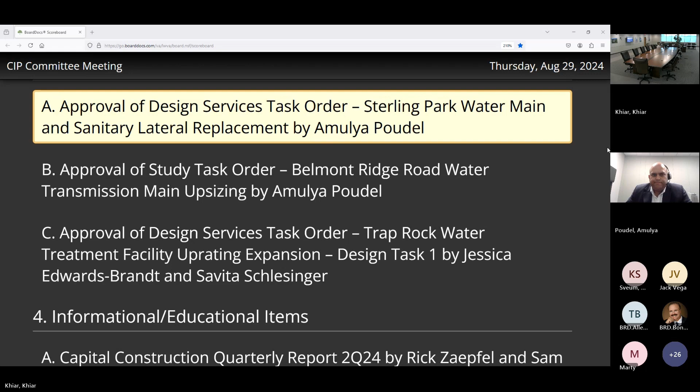Good morning, Mr. Chairman and the members of the committee. My name is Amulya Poudel, Program Manager with Capital Programs Group. I am here this morning to seek your approval of design task order for the Sterling Park water main and sanitary lateral replacement project.

Some background on this project: yesterday at the finance committee meeting, asset management team's Kathleen had a wonderful presentation that went into a lot more detail on why we need these R&R projects. This is a very summarized version of that. Overall, our system is a relatively young utility. However, certain pockets, mostly in Sterling, the pipes there are now old and have significantly deteriorated, and they're now in need of repair, rehab, and replacement. Currently in our water system, we have about 70 miles of cast iron pipe, and the goal is to replace them over the next 14, 15 years.

Over the last couple of years, the asset management team has been working on assessing the condition of all of these linear assets, taking into consideration things like pipe age, material, break history, local site condition, and the likelihood and consequences of failure. The asset management team has put together a priority list, and as we move forward, we will be addressing each of those prioritized projects. Today's project that I have here for your approval is one of those early projects.

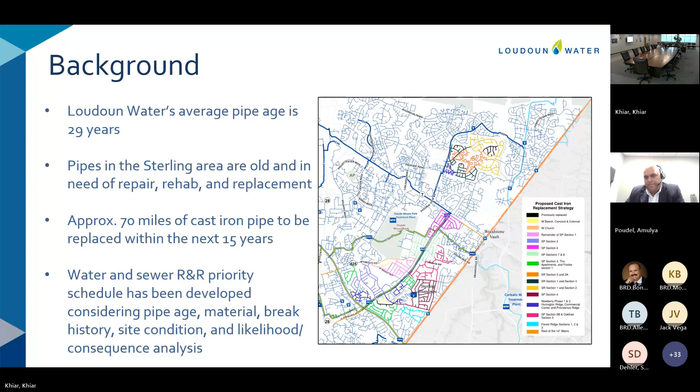So project location: in the central system, we operate our water distribution in 4 distinct pressure zones. This project is in zone 510, and it's in the Sterling area, generally bounded by West Church Road, West Holly Avenue, and North Sterling Boulevard. There is a little more than 5 miles of pipe in this area.

The yellow highlighted streets are water main and sanitary sewer that we will be addressing with this project. As you can see, there are two sections that are not included, and I'll come back to this after my next slide.

The driver for this project: the exhibit on this screen is a screenshot from our GIS. Each of those brown diamond-shapes represents a water main break that we have had in the system. As expected, most of these are in the Sterling area, and even within Sterling area, the circled area is where we have the most concentration of breaks. I think on the last count, since we started keeping track of the breaks, we were at about 1,084 or something, and almost a quarter of the breaks occurred in this general area.

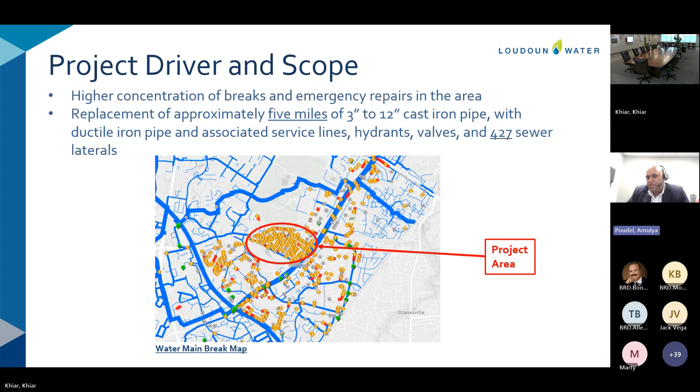On the sewer side, back in 2013, we rehabilitated the main sewer lines—we CIPP lined all the pipes in this area. However, at this point, the laterals that serve individual homes have significantly deteriorated and are primarily driving inflow and infiltration into our system. So with this project, we will be replacing all of those sanitary laterals that are within the project area.

Going back to the slide, the reason we do not have these two sections included in this project is that within this area, these two streets in particular had a higher concentration of breaks. So we carved them out as a separate project. The board approved it a couple months ago, so design is already underway, and we plan to put them into construction sometime next year. We carved these out as a separate, earlier project than this bigger package here I have in front of you today.

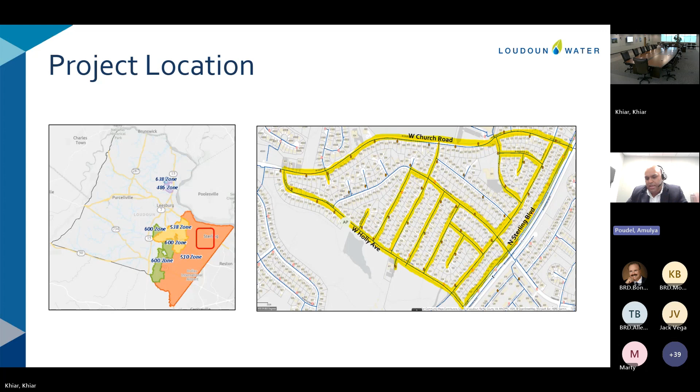I do not see raised hands, so I'll keep going with my presentation. This is the typical scope of work associated with a linear project like this. The consultant will be tasked with providing project management throughout the duration of the project. The design services on this task order will include aerial survey, topographic base mapping, some geotechnical investigation, and primarily preparation of bid drawings, specifications, and cost estimating.

On the permitting side, most of this water line is in VDOT right-of-way in a roadway, so there will be heavy coordination with VDOT when it comes to permitting for this project, and some Loudoun County permits. When we are ready to bid this project, we will need some assistance from the consultant with responding to bidders' questions, preparing addendums, and things like that, as bid phase services are also included in this task order.

I have two questions. I assume that the sewer laterals and the water laterals are just to the property line. Is that correct? Yes, we will address only up to the property line. The meter crocks would be...

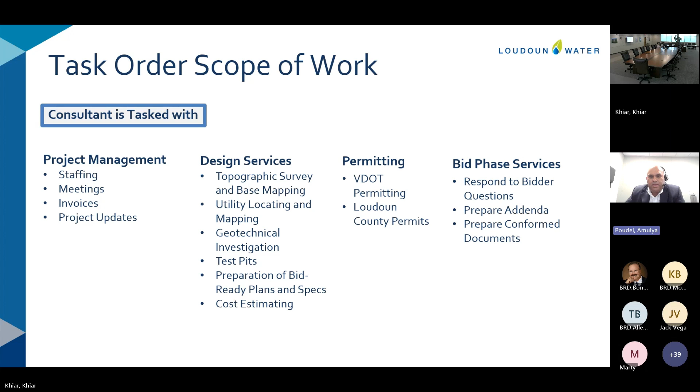So for this project, we selected J2 Engineers. J2 is one of our civil on-call consultants, and they've performed several linear sewer and water projects for us here just within the last couple of years. They're very familiar with our engineering design manual and Loudoun County and VDOT permitting process.

For this project, what I have for you here is the itemized breakdown. This is a very high level breakdown for the purpose of today's presentation, but the way we came to this is we built it from the bottom. The spreadsheet we use goes into much more granular detail, with multiple tasks, subtasks, and various labor categories. So that's how we came up with this fee that was acceptable to us.

In this particular project's case, we had some other directly relevant projects. Broad Run Farms would be an example, about the same size. So we had some other data points we could use to compare how this fee lines up with our past experience. Overall, we found the fee of $558,000 for this almost 5 miles of pipe replacement project acceptable.

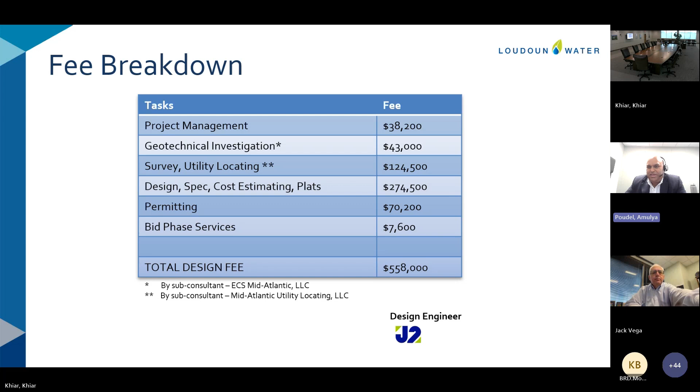Thank you. Again, I do not see any questions, so I'll move forward to the next slide here.

The next slide here is something we've been tracking. This is in our CIP plan, the 10-year CIP plan. We've been tracking this project under Water 189.

The only thing I want to note is last year when we were doing the CIP plan, we were tracking the sanitary lateral under a different project. But over the last year, we've talked a lot about these R&R projects, and we've come to an agreement that it makes a lot more sense to do this lateral replacement together with the waterline, since you'd already have all this maintenance of traffic in place and disturbance in the area. So this year's CIP will change this. I wanted to note that in the CIP, we were tracking it under 2 different CIP numbers.

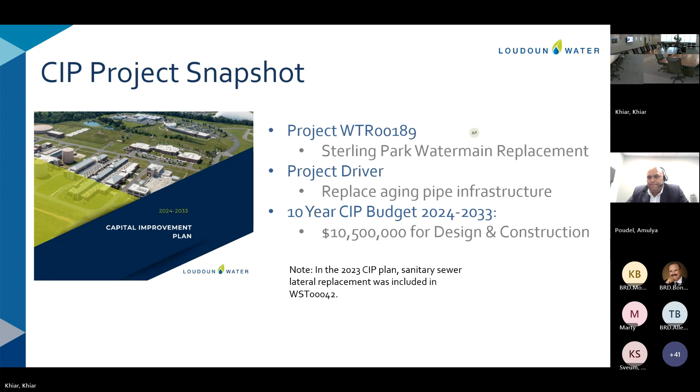And this is my last slide before the motion, so I'll take a pause for any questions. Do not see any questions. So with that, Mr. Chairman, I have the motion in front of you for your consideration.

Are there any other questions? No, sir. Jim, you want to read the motion? You seem to be ready. Sure, I'll be happy to.

I move the recommendation to the board to award a design task order for the Sterling Park Water Main and Sanitary Lateral Replacement Project to J2 Engineers, Inc. for $558,000, with an approximate 5% contingency to be controlled by the general manager, for a total authorized budget of $586,000. Additional costs will require board approval. I further move that this should be placed on the consent budget, consent motions.

This is Marty. Can we have a roll call vote? Yes. Mr. Bonfils? Yes. Thank you. Mr. Moody? Yes. Mr. Sveum? Yes. Mr. Vega? Yes. Thank you.

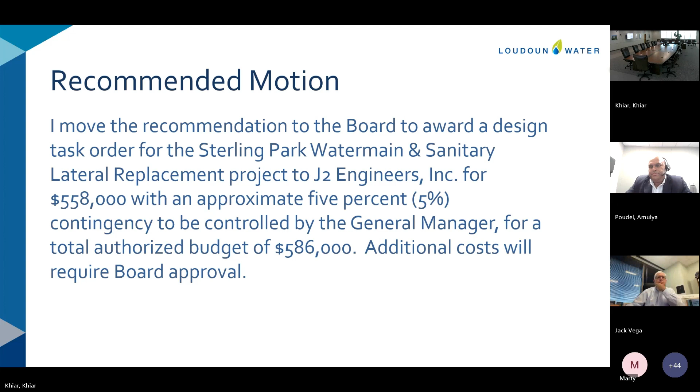Okay, the next item is the study task order for Belmont Ridge Road Water Transmission Main upsizing.

So, project location: this project is in the 538 pressure zone, generally located along Belmont Ridge Road between Route 7 and the Goose Creek Water Treatment Facility.

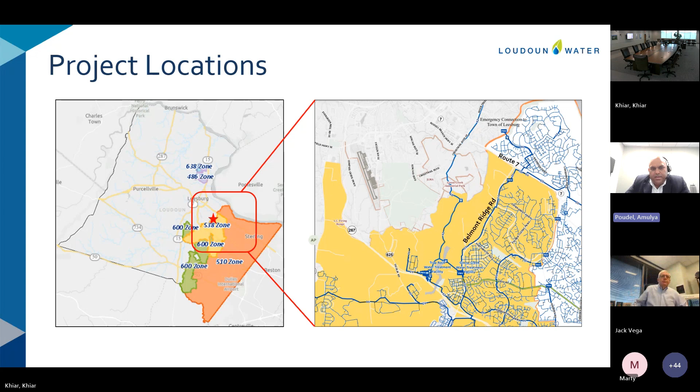Some background on the project: as you see on the exhibit to the right, there are three distinct water segments in this corridor. Segment one, highlighted red, is about 2,200 feet of 20-inch ductile iron pipe installed in 1973. Segment two, highlighted yellow, is 7,600 linear feet of 20-inch ductile iron pipe installed in 2019, beneficially accepted by Loudoun Water in 2019. Sandwiched between these two segments is approximately 3,200 feet of 36-inch pipe, also beneficially accepted in 2019.

I want to give a little more background on these projects. These two segments beneficially accepted by Loudoun Water in 2019 were relocated and installed in their current location along with the county's Belmont Ridge Road widening project. The water line we accepted in 2019 was actually installed by the county roadway contractor in 2018, and coordination about this relocation started even further back in 2015, 2016.

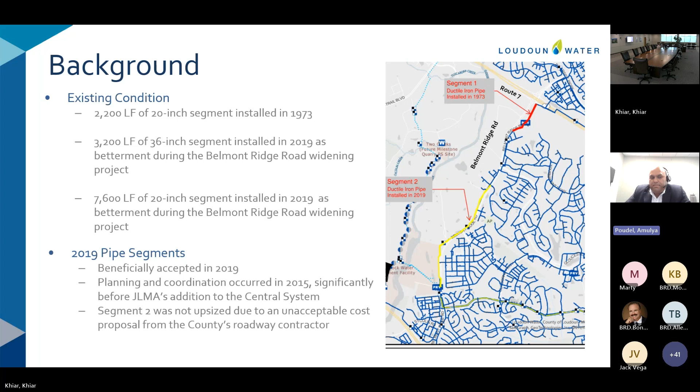Like I said, we had just gotten started with the utility master plan update when these lines were being relocated. The 2018 water distribution update did recommend 36-inch pipe along Belmont Ridge Road. In 2019, with the addition of the JLMA service area, our master plan was further updated. At this point, with all the new demand from JLMA, the study identified that the 20-inch water main along Belmont was a bottleneck to the system and recommended adding flow capacity on that corridor.

With implementation of this recommendation, what will it do for Loudoun Water? One, it'll help us meet the growing demand, accelerated by the addition of JLMA. In addition, we are now taking steps to expand the Trap Rock plant from 20 MGD to 32.8 MGD -- that's the next presentation Savita will give after me. This upsizing would allow us to pump higher flows from the expanded Trap Rock to our distribution system, so we need this to support the Trap Rock expansion too. Just a little background and driver on why we need this project.

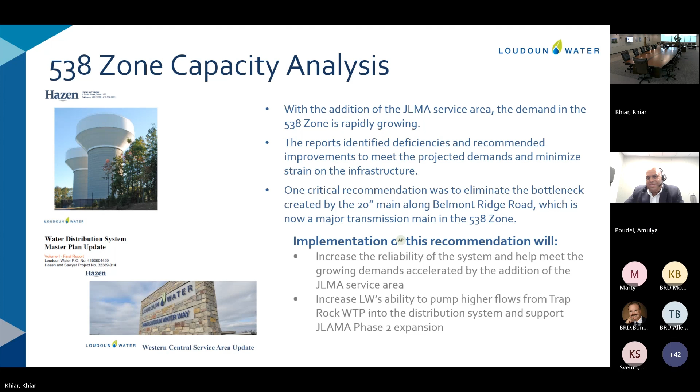Any questions? Right, I'll move to the next slide.

Now, because this existing water main is relatively new, 6-7 years old, we conducted hydraulic analysis, and hydraulically it is feasible to add flow in this corridor two ways: one, we can replace the existing 20-inch pipe with a larger 36-inch pipe; the other option would be to add a second, parallel pipe running generally along the existing yellow highlighted main, which would also deliver the same hydraulically. Since there are two options, we felt the need to further look at what is more beneficial and cost effective to Loudoun Water, and that is what this task order in front of you today is for.

So the consultant will evaluate both options: cost analysis, impact on operation during and post construction, and permitting needs between the two options. So basically, this is not a detailed design -- this is a pre-design study to help Loudoun Water make a decision on how we want to move forward.

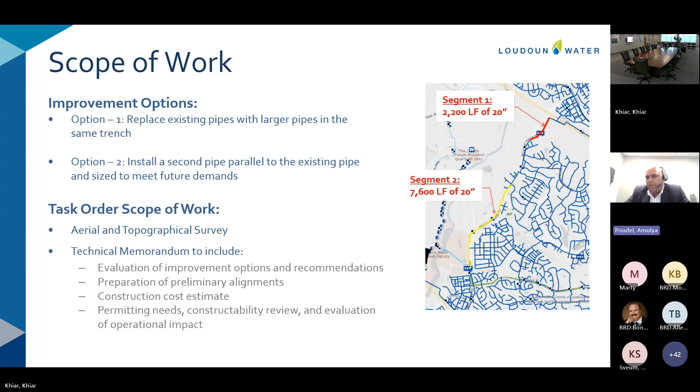In this slide, I dive a little deeper into the activities involved in this task order. Like every other task order, this will involve project management throughout its duration. We will capture aerial imagery for the site, and the consultant will prepare a topographic base map, preliminary plans and profile for the water line. They'll develop costs for multiple alignment options, look at constructability issues, permitting needs, and any additional easement needs -- if we put in that second pipe, it will require more easement, so that will also be looked at in this tech memo.

They'll also look at operational impact -- replacing an existing 20-inch with 36-inch in the same trench will cause issues during construction. All of this would be looked at, and the consultant would summarize their findings in a tech memo and provide a recommendation to Loudoun Water.

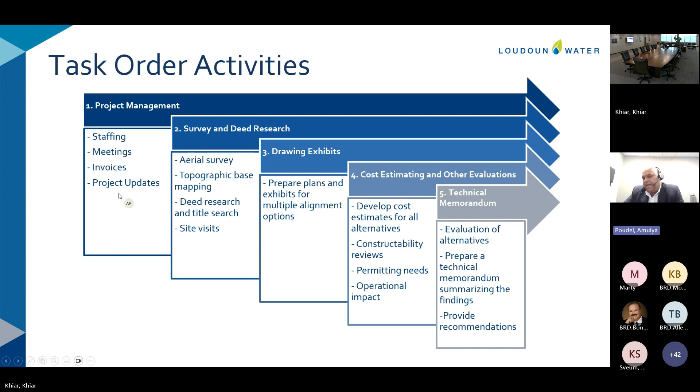And at that point, Loudoun Water will select and decide how we want to move forward with this upsizing.

I have a question. Do you want me to go back to the previous slide? No, it's fine. You're probably going to find it out, or maybe you already know. Is the head loss between two 20s equal to the head loss between the 36?

I don't know if Darren is on the call. I know hydraulically both of them work, but when it comes to exact head loss, I do not know. Darren, are you on the call? Can you help us with that?

It's okay, I was just curious, but I can get back to you with the answer, Mr. Sheldon. Yeah, it's not critical, but you guys are going to look at that because it affects operating costs. Okay, yeah, I was just curious.

Go ahead, keep going. Darren, did you have an answer? No, I don't have that off the top of my head. Okay, thank you, that's okay. That was just a curious question.

So for this project, we selected RK&K as the design consultant. RK&K is one of our civil BOA consultants. They recently completed a 24-inch water main extension in the JLMA West area, and they're pretty familiar with Loudoun Water's engineering design manual and the permitting process in Loudoun County.

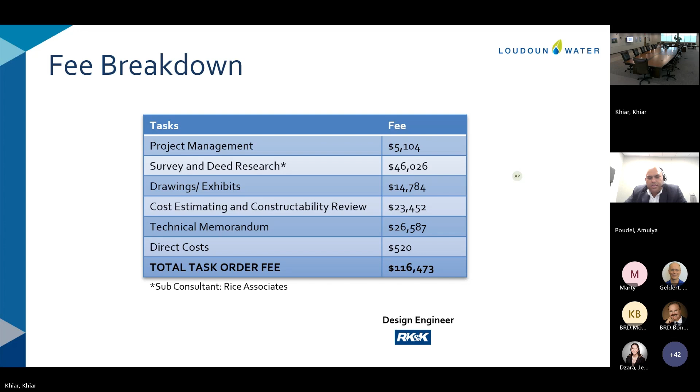This project is also in our 10-year CIP plan. We are tracking it under Water 86. This is the last slide before the motion, so I'll pause again for any questions.

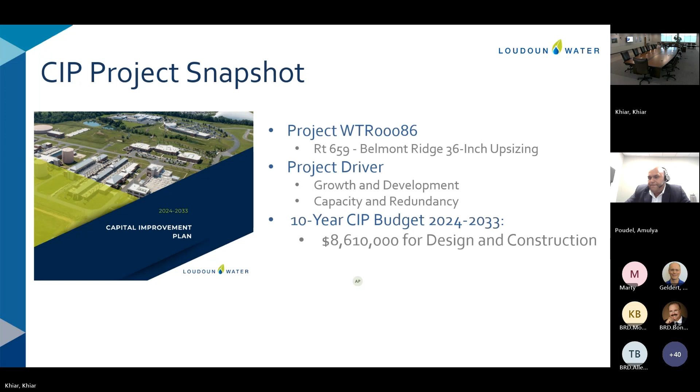Do not see any questions. Mr. Chairman, I have the motion in front of you.

I'll make the motion this time since there are no questions. I move the recommendation to the board to award a study task order for the Belmont Ridge Water Transmission Main Upsizing Project to RK&K Incorporated for $116,473, with an approximate 5% contingency to be controlled by the general manager for a total authorized budget of $122,300. Additional costs will require board approval, and I recommend this go on the board consent agenda.

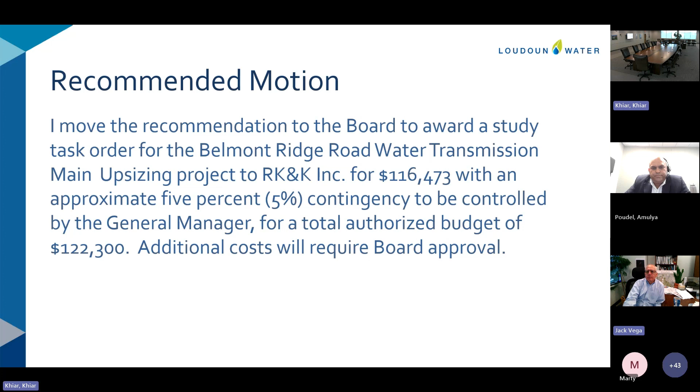Okay, the next item is approval of design task order for the Trap Rock Water Treatment Facility uprating expansion to 32.8 MGD, design task 1.

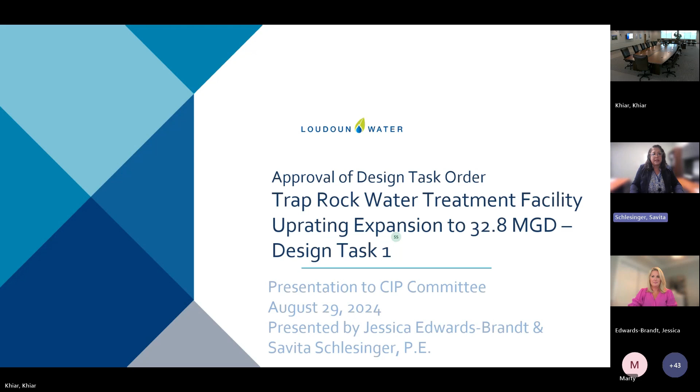Good morning. So I oversee operations and will be providing background on this design task order to increase the Trap Rock treatment capacity from 20 million gallons a day to 32.8 million gallons a day.

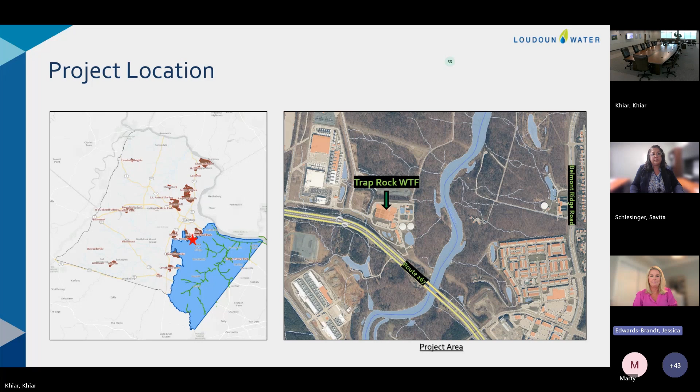So a little bit about our supply background. To supply Loudoun Water Central System, we have three sources. The first is Fairfax Water, and we can purchase up to 50 million gallons a day from Fairfax Water. Our second source is the Trap Rock Water Treatment Facility, which is permitted to treat 20 million gallons a day. Our third source is the Goose Creek Reservoir, which is an emergency source only.

Goose Creek can be fed from Beaver Dam Reservoir, which can be pumped and treated at the Trap Rock Treatment Facility. On the raw water side, Trap Rock's Potomac River Pump Station is permitted to withdraw 40 million gallons a day from the Potomac River. In addition, our Milestone Reservoir will provide infrastructure to store water from the Potomac and then pump to Trap Rock up to 40 million gallons a day. That Milestone Reservoir is projected to be online in 2028.

Loudoun Water's approach as part of the Potomac water supply was to build Trap Rock to 20 million gallons a day, but design it so that increasing capacity would be straightforward and planned. We are now at the point where we need to get ready to expand.

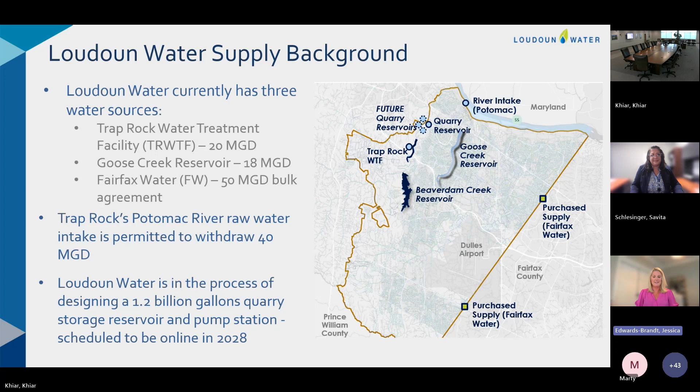Let's move to the next slide and talk about the drivers for this project. The operations team, with planning and engineering, has been monitoring demands in the central system. As we started to see demands increase, we began to work with our regulator, the Virginia Department of Health, to execute a year-long study to prove that Trap Rock could produce 32 million gallons a day with minimal impact to our processes and minimal construction.

We started the year-long study in 2022 and finished in 2023. We've worked very closely with VDH, our regulator, to work through that process, and they are in agreement with what we're doing. They are also looking at our demands and production, and they are in support of our proposal for increasing our infrastructure.

So let's take a look at the demands on this slide. This is our whole central system water demand production. The bottom line is our average day demand. In 2025, we're at around 29 million gallons a day, and in 2035, we're at around 39 million gallons a day.

We can easily supply the system with Fairfax Water, but we like to use Trap Rock because we have a lot of growth in the western part of our distribution system, and Trap Rock helps with that. It also helps with ease of operations, so we always have a percentage of Trap Rock water in our distribution system along with Fairfax water.

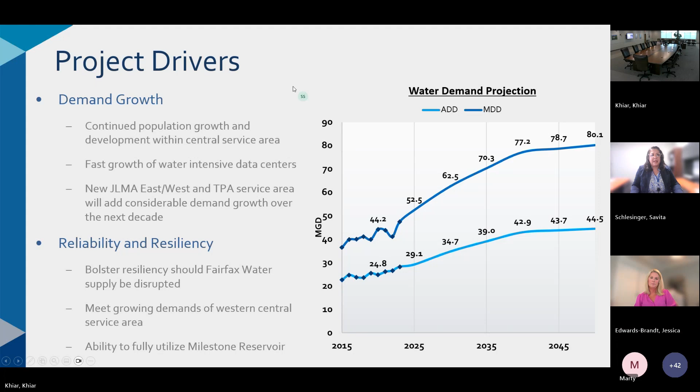Thank you, Jessica. As Jessica said, the Loudoun Water staff spent a year working with VDH and CDM Smith to understand what we could push through the trap rock plant as it's currently configured and meet all of the regulatory requirements. At the end of the study, the results showed that we could get to 32.8 MGD. VDH approved that in the middle of 2024, and so we're now embarking on a project to really get us to that expansion.

This expansion step was anticipated during the original plant design. As Jessica said, we're able to do this without really modifying or adding any process tankage. It's really all upgrades and expansion of supporting facilities.

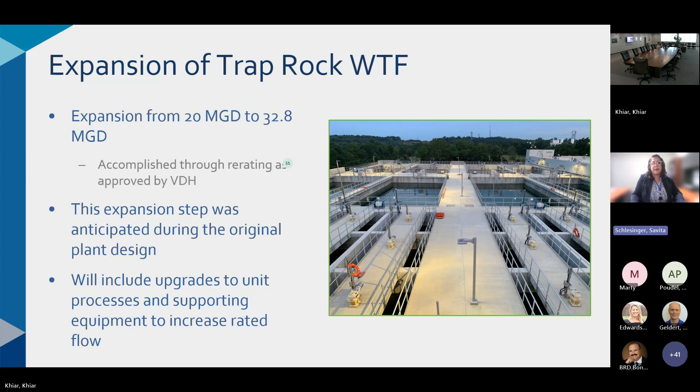So we did decide to split this design into 2 task orders. It will ultimately be one design package at the end, and we'll have one construction package, but we elected to split it into 2 design task orders so that some of the items on this list we can get to a 60% design fairly quickly, and other items need a bit more analysis and some decisions. We wanted to do a kind of preliminary engineering first, and then scope the final design in a second task order.

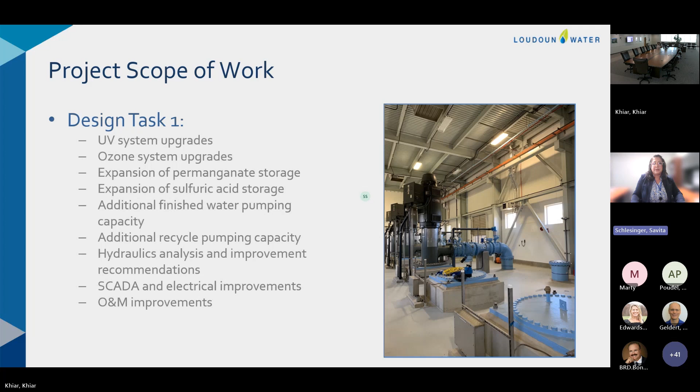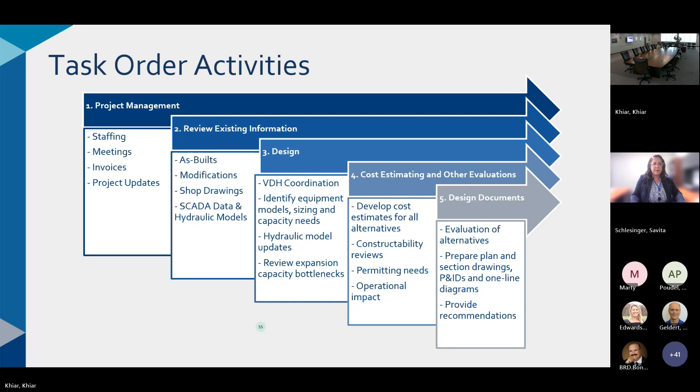And as I mentioned, we will come back in 2025 for the remainder of the design.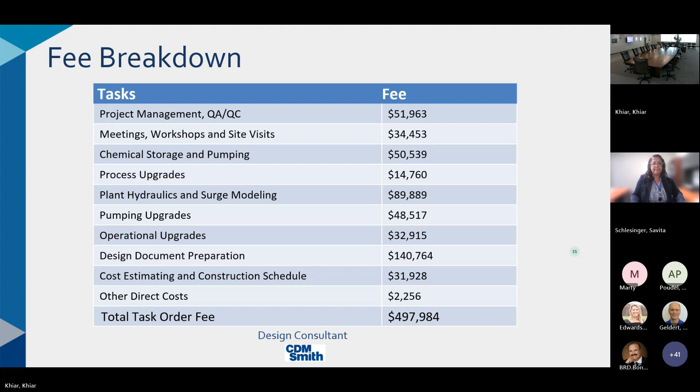Okay, here, whoops, sorry about that. So I do have a schedule here for you. This first design phase will take approximately 6 months, and then we will come back and seek additional funding for the remainder of the design. That will include additional funding for permitting and for the bid phase, where we will put the construction package out to bid. We expect construction to take approximately 18 to 24 months.

And as Jessica said, this is great timing. We're hoping a milestone right now is scheduled to complete in, I think, the end of Q2, Q3 of 2028. So this construction will wrap up shortly after that and will come online shortly after the milestone comes online.

So here is our CIP project snapshot slide. This is part of our 10-year CIP, and we have $2.1 million for planning and engineering.

And this is the last slide I have before I go to the motion. Not seeing any questions or hands raised.

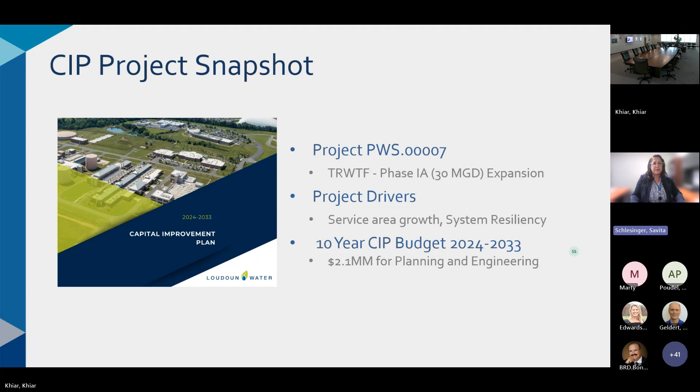Mr. Sultan, are you muted, sir? Oh, yes. Are there any questions? I have no questions. No questions for me either.

Okay, I'll make the recommended motion. I move the recommendation to the board to award a design task order for the Trap Rock Water Treatment Facility uprating expansion design task 1 to CDM Smith for $497,984, with an approximate 5% contingency to be controlled by the general manager, for a total authorized budget of $523,000. Additional costs will require board approval. And with the agreement of the rest of the committee, I'm recommending this go to consent on the board agenda.

This is Jim, I second. Can we get a roll call vote? Yes, sir. Thank you. Mr. Bonfils, Yes. Mr. Moody, Yes. Mr. Sultan, Yes. And Mr. Vega, Yes. Thank you. Thank you.

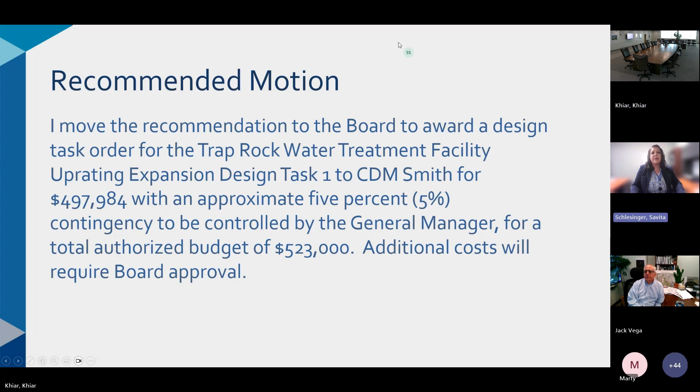Capital construction report? Very good. All right. Good morning, members of the committee. Can you hear me okay? Yeah, I can hear you. Okay. Great. So I'm Rick Zaepfel, and myself and Sam Flores will give the capital construction report here for the second quarter of this year.

So our agenda for this morning: we'll start off with several project snapshots of some of the smaller projects that have been in construction here through the second quarter. Then we'll go into a little bit greater detail on the Milestone Reservoir and Pump Station project, as well as the Broad Run expansion to 15 million gallons per day treatment capacity. And then we'll wrap up with our quarterly summaries of active, completed, and upcoming projects.

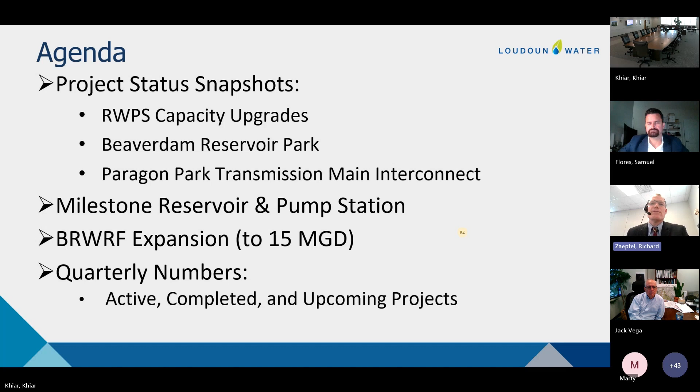Our first project snapshot is the Broad Run reclaimed water pump station capacity upgrades. This project is well along in construction through the second quarter. We have almost spent the entirety of the contract value, and some of the completed work activities during the second quarter were the installation of the variable frequency drives to wrap up the electrical infrastructure, as well as finishing the HVAC equipment installation, continuing painting and coating, and completing the commissioning, or testing and startup, of the new facilities.

All that remains for the third quarter is punch list and project closeout. This project has already served us very well, especially during some of the very hot days in July. We expect this project to be completed in the third quarter, and that will be shared in the third quarter report coming up in October.

And with that, I'm going to pass it over to Sam to walk through several projects. I have a question. I'm assuming we're 98% done since we're 98% value through. We are. The project, yes.

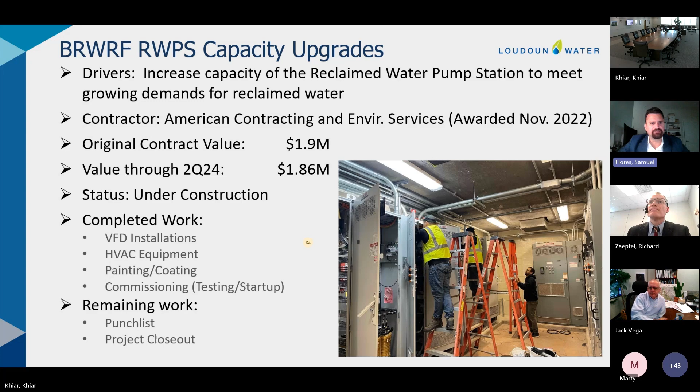Thanks, Rick. Khiar, I have requested control. Thanks, Khiar. Good morning, everyone. Oh, getting a little bit ahead of myself here. I will present on a few projects before taking a little bit of a deeper dive into Milestone Reservoir.

So we'll start with Beaverdam Reservoir Park, and the headline on this one is we are very close. At the end of our Q2 reporting period, we had completed all structural and landscaping work, the bulk of the scope of this project. There was some minor architectural work and corrective work on the parking lot asphalt surface that has since been completed. At the current date, it's only the administrative requirement of obtaining an occupancy permit from the county that's delaying substantial completion, so we're very close. After that, we have a short period of punch list work anticipated, with a target eventual completion date in early September, which would be followed by coordination with Nova Parks for the grand opening of the facility.

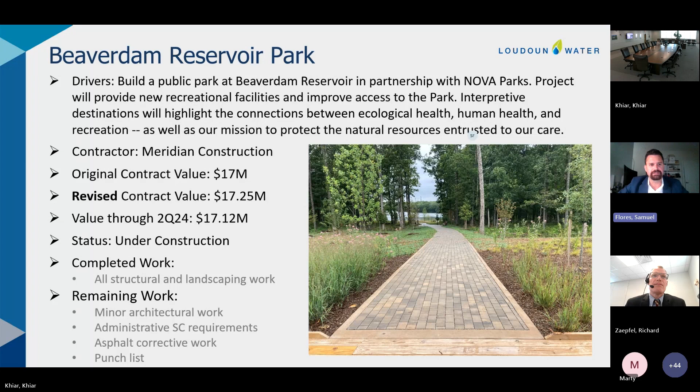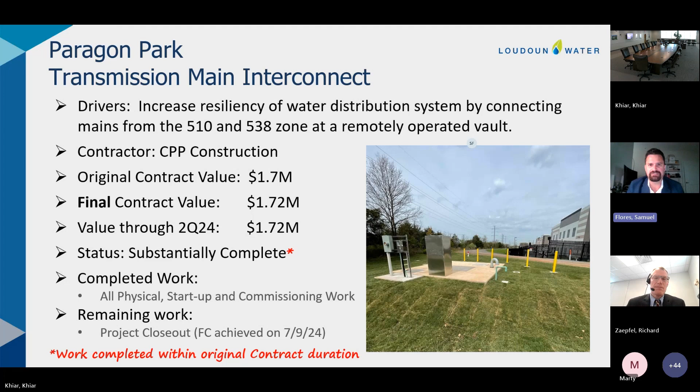We'll follow that with Paragon Park Transmission Main Interconnect. This project achieved substantial completion during the reporting period on June 6th, well ahead of its contractual deadline of July 4th. As a little bit of extra reporting beyond Q2, it achieved final completion on the 9th of July, so it was well ahead of schedule across the board. Budget-wise, we were just a little bit over 1% on changes over construction cost, so a very successful project overall, one of those rare instances of a project completing within its original schedule. I'd like to recognize our project manager, Matt Oshegi, for his efforts in resolving the issues we did have along the way to make this project a big success.

Next up, we have a little bit of a deeper dive into Milestone Reservoir and Pump Station. The intent here is to provide a quarterly update to the CIP committee, along with all of our construction quarterly updates. This is, I believe, the second entry in what will become a series of updates that we'll provide here.

At the end of Q2, Clark, our CMAR, had a lot of success in getting mobilized and hitting the ground running to get some critical work activities completed early. We do have the setup of temporary facilities, power, internet, trailers, all completed now. Initial site work, access crossing across the creek for the initial setup. We've started construction of our perimeter retaining wall and our permanent bridge.

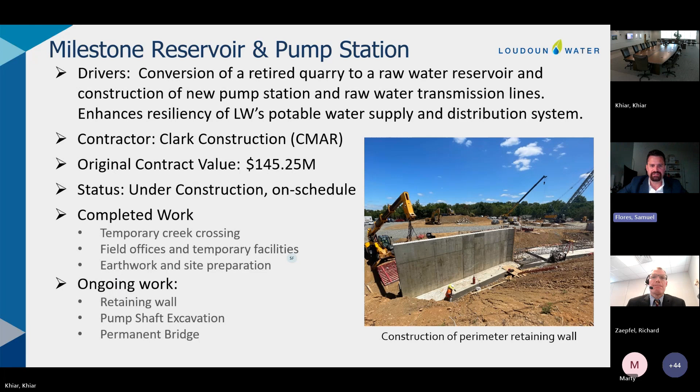And I think you'll see on the next slide here, the start of our pump station shaft, which is eventually going to become a 270-foot deep, 35-foot diameter pump shaft with 3 tunnels, as we've presented to the committee in the past year during our pre-construction phase.

So right now, in terms of budget, we have not incurred any additional costs to date. We are about 10% spent, which represents a little less than 10% in actual progress. There are obviously some bonds and insurance costs that were on the higher side of our typical project, which we disbursed at the beginning of the project. But we are making good progress and currently tracking about 2 weeks ahead of schedule on our critical path.

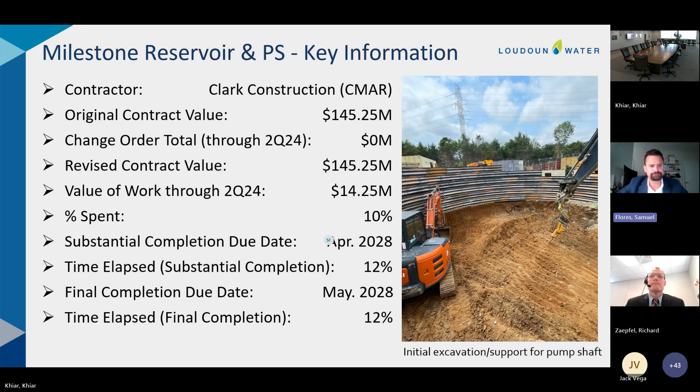In terms of communication between parties, so far, pretty successful overall. 60 RFIs and 200 plus submittals reviewed at the end of our reporting period. The intent there, of course, is, we have a long project, but that doesn't completely preclude us from running into supply chain issues that are still somewhat prevalent on the electrical equipment side. So we're trying to stay well ahead of any issues down the road there.

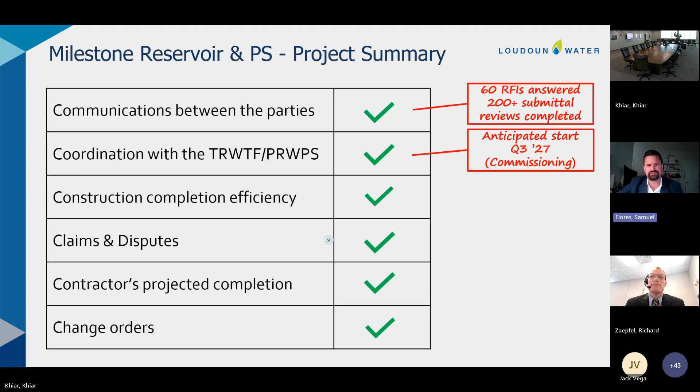In terms of communication with Trap Rock and the Potomac Raw Water Pump Station, we anticipate the bulk of that coordination is going to take place when we start the commissioning phase of the facility, which is expected to be around Q3 of 2027. So nothing to report on that.

As I said, we are ahead of schedule currently. Big kudos to our subcontractor Drill Tech for really taking the bull by the horns on the tunneling work and getting us going there. So far, no unresolved claims. Had a few, but it's all been worked through to date. No delays claimed or reported.

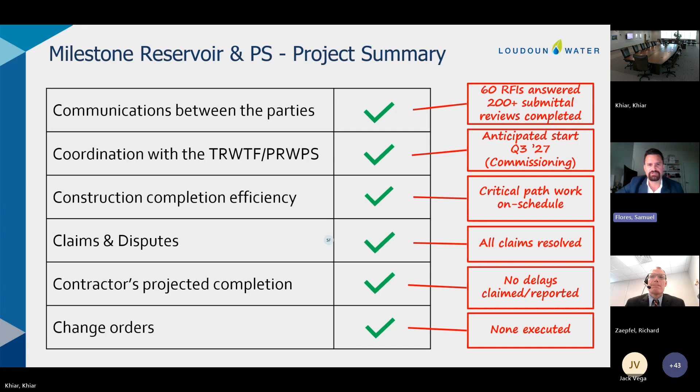And in terms of change orders, none executed to date or at the end of the reporting period, but we have negotiated a few changes that we anticipate will be incorporated towards the end of Q3, and so we will report on those during our next update.

With this last slide here, the intent is to bring a preview of the shaft excavation to the committee. This is actually a model, a pre-rendered preview of a model that has been generated by our inspections team using LiDAR. Nowadays, our inspectors can attach LiDAR scanners to iPads and things like that, and really get very quick, detailed records of the subsurface condition as we mine down the shaft. Before this, what you see on top here is the shotcrete liner that's initially applied along the circumference of the tunnel to protect miners.

It's going to get a final liner after that, but as we go down, we are building that shotcrete. We are concealing the surface of the rock, and so this LiDAR scan that we will be continuing through the length of the vertical shaft and horizontal tunnels is going to allow us to go back and have that detailed reference of subsurface conditions. We can take simple measurements and just go back and assess anything that we need to down the road to resolve claims or just in general have that record.

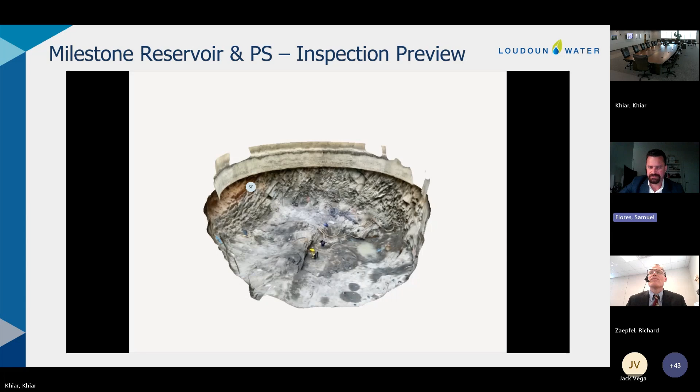So the intent here is to continue to present, maybe time lapse is not the right term, but an update along with each construction quarterly update to take you guys on a journey as we go down the 270-foot shaft depth and the horizontal tunnels. And with that, before I turn it over to Rick, I'll take any questions from the committee.

I have a question. Are we creating a digital twin of the after construction for our record keeping and maintenance?

Do you mean of the shaft itself, Mr. Vega? And the piping, yes. So in terms of piping and all the other infrastructure, we do have a task to provide record drawings of the facility. We do have a pre-rendered model of the design that could, in theory, be as-built to reflect final conditions and any changes. But I don't think it's quite something that we have in our scope to update the model itself. It could be, perhaps depending on how we are doing on our CA budget towards the end, we can evaluate whether that's something that'll bring value to us for the future. Thank you.

Anything else? All right, Rick, I'll turn it over back to you.

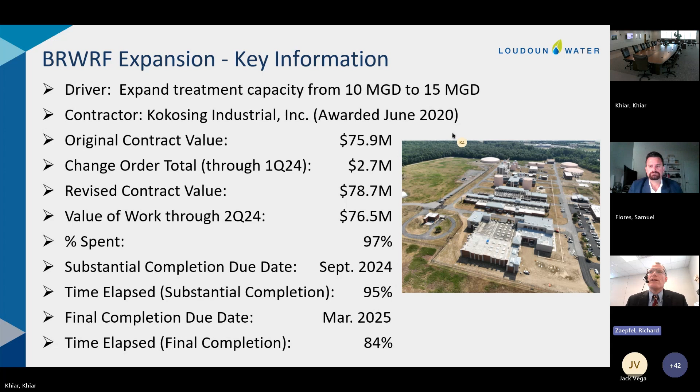Okay, so now we're going to take a look back at the project status here. What I've got in front is a view of the project's pre-construction, showing all the different work areas as red or not started. This would be the view as of the summer of 2020. Also not shown on this graphic is all the yard piping that couldn't be depicted, but there were several miles of yard piping, including large diameter piping, that were also part of the project, in addition to all the work areas shown in red.

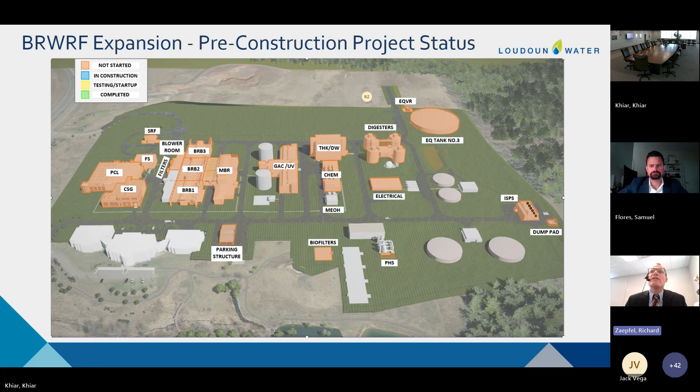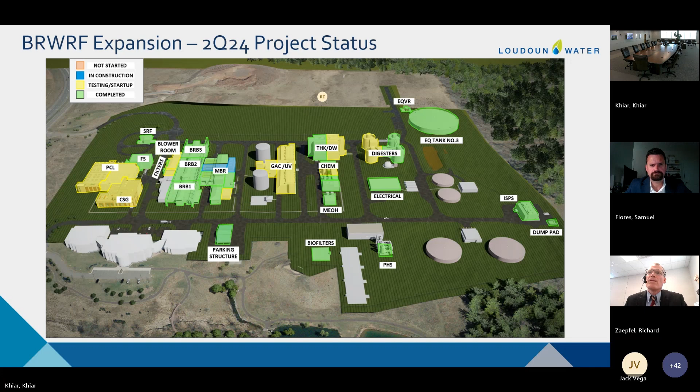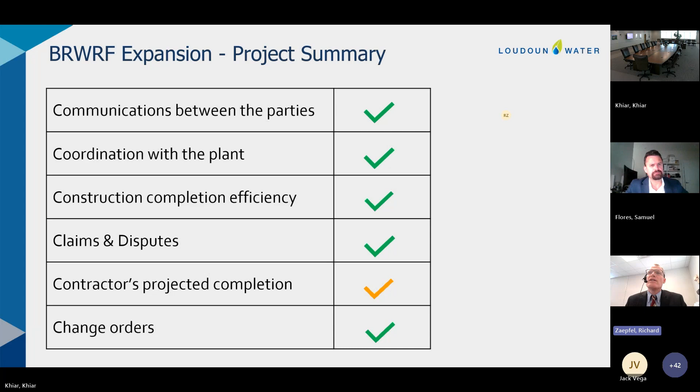All right, now for our project summary here. Communication is still very good between the owner and the contractor on this project, and we've used the contract tools to the maximum to foster that communication. We've completed 590 or so requests for information and answered those questions that the contractor has submitted to us. We've also reviewed approximately 2,185 submittals that the contractor has provided and returned those to the contractor.

In terms of coordination with the plant and with operations to perform this retrofit project, we have executed around 610 individual coordination and shutdown requests that have impacted different parts of the plant as necessary to facilitate the construction. In terms of our construction completion efficiency, the contractor is 85% complete in terms of punch list items.

What that tells us is the contractor has done a very good job working on those items required for final completion, really in advance of substantial completion. That's a good indicator that the contractor is in a strong position to not have to use the entire 180 days to get to final completion after substantial completion. So a good sign for completion of the project there.

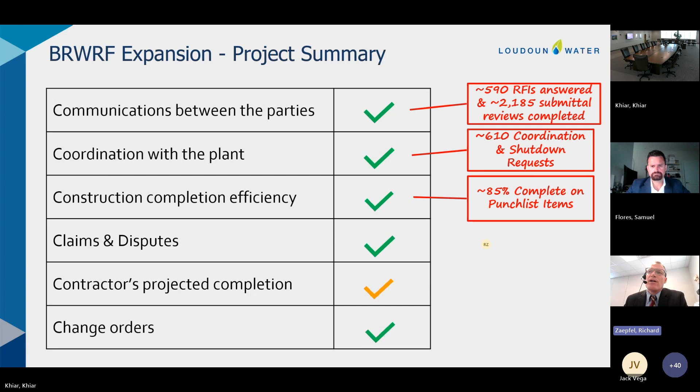Claims and disputes: we don't have any outstanding claims and disputes. We've been able to resolve all of the claims that the contractor has submitted thus far. In terms of our completion, we're tracking to be about a month late as of the contractor's latest project schedule update, so we're looking at late October, early November as the proposed finish date as of now. We're still at 14 change orders executed so far on the project.

Any questions about this information? Yeah, I have one question.

With the coordination and shutdown, have we had any permit violations as a result of it, or have we avoided all of that?

We have not had any permit violations that have been a direct consequence of the project. So we've done a very good job to maintain plant operations alongside of these disruptions and shutdowns and tie-ins and such that have been necessary to keep the construction moving forward.

I assume our plant personnel should get a kudo on that.

Absolutely, fabulous job by our operations and our maintenance team at Broad Run and the contractor as well. Really, the parties have worked well together to move this project forward and deal with a lot of the complicated aspects of the project while keeping the plant running. So, yeah. All right, thank you.

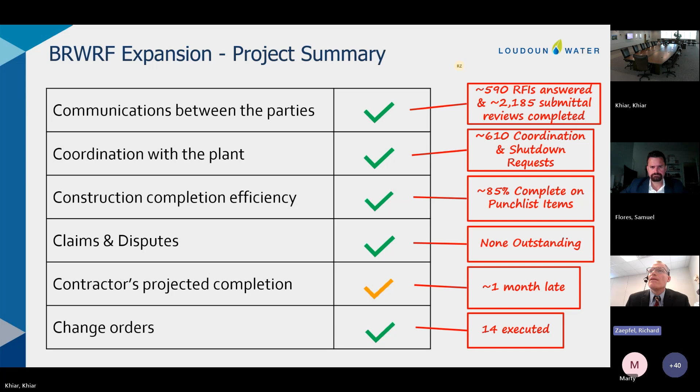Okay, we'll move ahead to our active construction projects. So what we've got is the list of the 12 projects that were active in construction through the second quarter. The 3 columns on the left are related to contract time and schedule, and the 5 columns on the right are information related to contract price, contingency utilization, and change orders. I'll provide this information on the Broad Run roofing project.

So that project was late. There were some delays, but we have reached agreement with the contractor to reconcile the delays and nearly close that project out at this point. So the roofing project should appear on the closed projects list for the third quarter report.

This is Keith. You mentioned there were delays, can you elaborate a bit more on the cause? Sure. The primary delay on this project was the skylights. The contractor had some trouble administratively getting those ordered, and then that led to the delay of the delivery, and the fabrication of the skylights also took a bit longer than anticipated. So those things combined to delay the project.

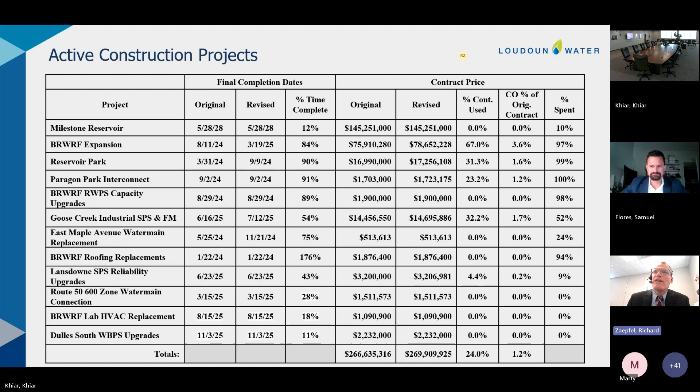Okay, I've got 2 more slides here. We had one project achieve completion during the second quarter, the East Beech Road Sewer Replacement Project. This will be the last mention of this project as we reached final completion in the second quarter, and that's the final stats on that project. Any questions there?

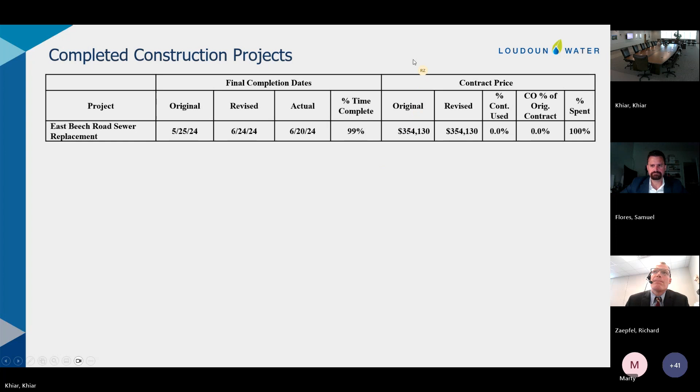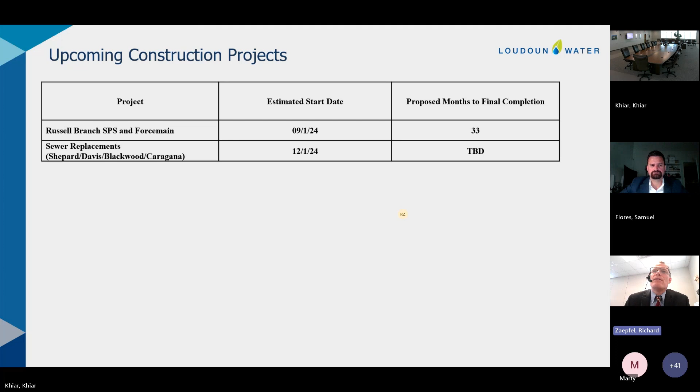Okay, and then the last slide here is just the look ahead for anticipated projects that would start construction in the third or fourth quarter of this year. We've got 2 that will be starting construction over the next 6 months or so. And that is all that we have this morning.

Any questions or any additional questions? No, thank you. Nope, doesn't seem like it. Good job. Okay, thank you.

Mr. Lipinski, I would assume, is doing this. I am here today, Mr. Chairman. I was going to mention that I think I'm batting cleanup today, but actually being the 5th item, I'm not sure that constitutes cleanup.

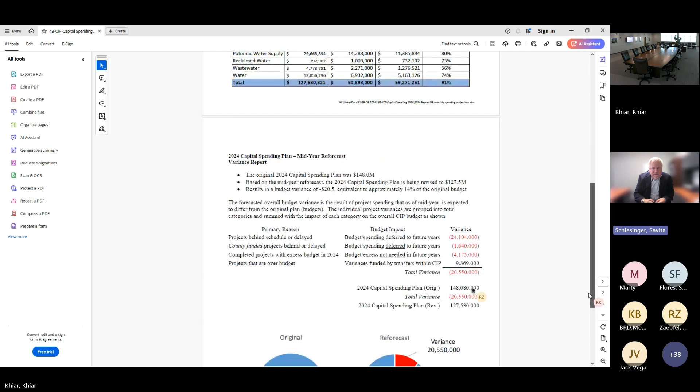So I'm going to presume there aren't any questions and ask Khiar if you can just scroll over to the second page of the presentation. Okay, so the second thing that I'll talk about is the mid-year reforecast.

So this time of year, every year, we take an opportunity to look at our projected spending for the second half of the year and see whether we can update those numbers. And we've done that. Rather than the 148 million which was in the approved budget, we think we're going to spend about 128 million at the end of the year. So about 86%, coming in close to the 90% we've been tracking all year.

There's some characterization of the spending variances in the four categories, but the total we project we will not need at the end of the year is just a little over $20 million of the original 148. That puts the reforecast at about 127 or 128 million. If there are any questions, I'd be happy to take them. We've been doing really well this year, and kudos to staff for originally forecasting well and implementing spending to match that forecast.